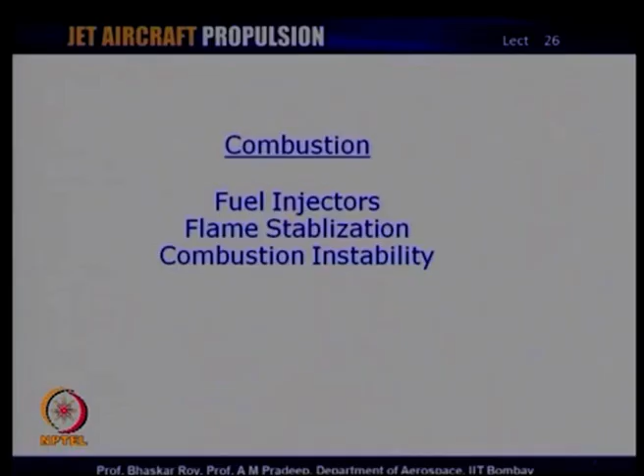So, these are the issues we will discuss in today's lecture, starting with the injection of fuel, then going on to the flame stabilization, and then talking about certain issues related to stability of the combustion phenomena itself in the combustion chamber. So, let us take a look at these issues now one by one.

Now, fuel injectors: people have been designing injectors for more than 50 years now. Various kinds of injectors have been designed over the years, and we will look at one of the most commonly used fuel injectors in most of the aircraft engines these days, and try to understand exactly how the fuel injection is carried out to aid the process of combustion. It is a little more involved than any other kind of fuel injector that one may have seen in any other kind of engine, and these fuel injectors are specifically designed for jet aircraft engines. So, they are unique kind of fuel injectors. Let us take a look at some of these injector related issues and one such very good modern injector.

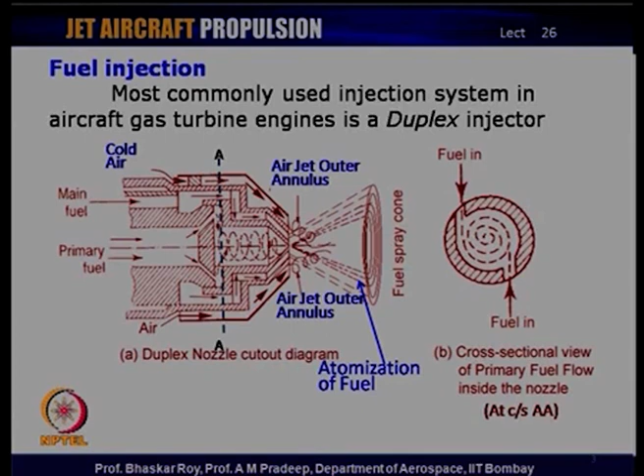So, having looked at the duplex injector, we can sum up by saying that we have two concentric fuel supply manifolds, which are supplying fuel into the combustion chamber. The central one is used only when low fuel supply is required, as I mentioned, which could be during cruise, and when high fuel flow rate is required during acceleration of the engine or of the aircraft, and during takeoff and climb, both fuel flows could be open and high fuel flow rate is supplied into the combustion chamber.

Both the fuel supply nozzles participate in the process of creating this concentric jet, that is the jet cone, and that spreads out into the combustion primary zone. And so, the primary zone is where this jet of fuel is infused, and that is where the flame is created. The spreading out of the jet cone or the fuel jet is the first step towards increasing the liquid fuel surface area, and that surface area increase is the intended purpose of creating this jet cone. And once that is increased, the jet actually breaks up into very small droplets, of the size of fractions of millimeters in diameter, and these droplets then evaporate very fast.

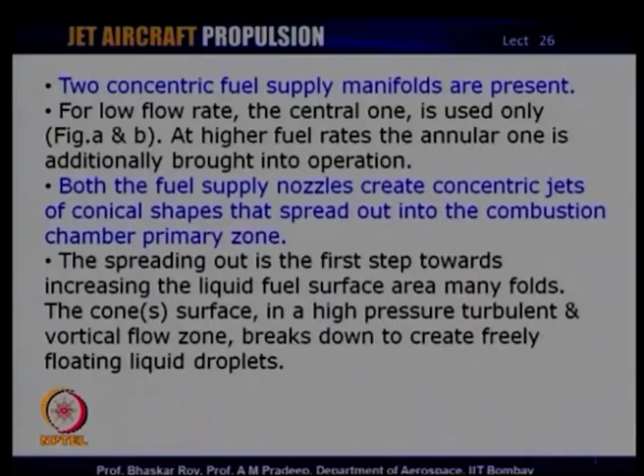So, the high pressure turbulent and vortical flow zone created in the primary zone breaks down this cone and creates freely floating liquid droplets, and that is the mechanism that needs to be created in the combustion chamber to aid the process of combustion. Without this mechanism, and there is a lot of engineering that goes into it, the combustion inside the aircraft engine would not be possible in the manner that it needs to be done. This later process increases the fuel liquid surface area many times over, and as a result it aids evaporation and mixing, and all this needs to be done in the primary zone with the air, and remember this mixing has to be done in a correct fuel to air ratio.

The additional annular air passage around the fuel, which is discharged through the nozzle's outermost annulus, as we have just seen, has as one of its main purposes to avoid carbon and other combustion product deposition on the face of the nozzle. Now, this is an important issue. Once the fuel comes out of the nozzle, you have flame, you have combustion products created, and remember the primary zone is a very low velocity flow area. So, once the combustion products are created, there is every possibility that some of them from the flame zone can float down and deposit on the face of the nozzle. Now, this is a problem. This is simply known as carbon deposition in simple engine terminology.

It means that a lot of combustion products are getting deposited on the face of the nozzle. Now, if that happens, the fuel exit may get choked, and the fuel would not come out of the opening that is created for the fuel jet. Now, this needs to be avoided, and this air jet has this additional job of making sure that the combustion products do not come back on the nozzle face, and they get literally blown away from the nozzle, so that the nozzle face remains clean for the entire operation of the engine.

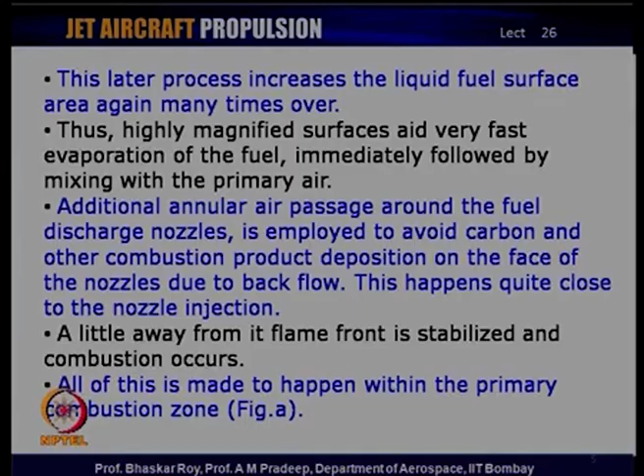We are talking about simplex injectors. So, we can have a quick look at what a simplex injector is actually. It is actually used in many gas turbine engines which have a comparatively simpler operation schedule and do not have too many high fuel supply and low fuel supply requirements, and steady fuel supply would be sufficient. This actually means that it provides a very simple fuel nozzle system.

Some of the later ones, as I mentioned, are also equipped with the outer annulus of air spray. That means, outside this fuel supply there is an air spray that is coming, which would aid the process of injection cone creation and also driving away the combustion products.

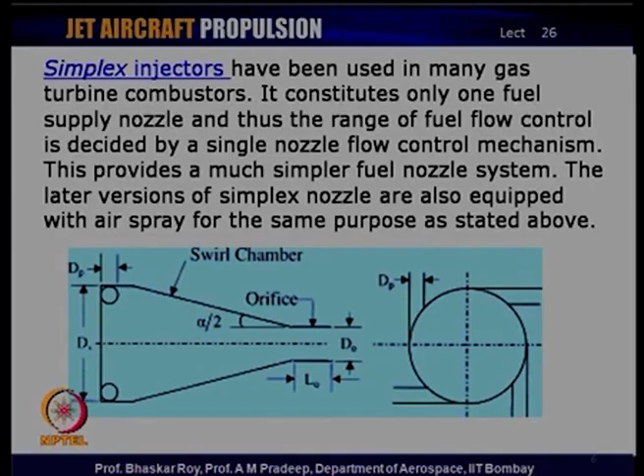So, this creation of this vortical flow inside the nozzle is extremely important, because it helps create the cone that comes out from the jet, and that cone is extremely important in the process of evaporation and mixing. Now, we look at some of the issues related to the combustion that are normally created by the combustion itself.

Now, during the process of an aircraft engine operation, we have seen an aircraft has to take off, it has to climb, it has to cruise, it has to do all kinds of maneuvers, and then it has to descend and come back and land. During all these processes, the fuel supply into the combustion chamber is most likely to vary. If you have a military aircraft which does all kinds of maneuvers, accelerations, decelerations, turnings and fast recoveries, during all these processes the fuel supply would need to be controlled very quickly.

So, the control of the fuel supply then also means that the injection process and immediately thereafter the flame that is created, that means the entire combustion process, would need to have a stability of its own. Now, this is easier said than done, because we have seen that the fuel air ratio should always be somewhere near about the stoichiometric ratio, the chemically correct fuel air ratio.

If the fuel is too much, it becomes a rich mixture and the combustion gets blown out. If the fuel is too less, it becomes a lean mixture, and then again the combustion gets extinguished. So, in a very narrow range the fuel air mixture needs to be held. So, the trick is to hold the fuel air mixture very close to the correct ratio.

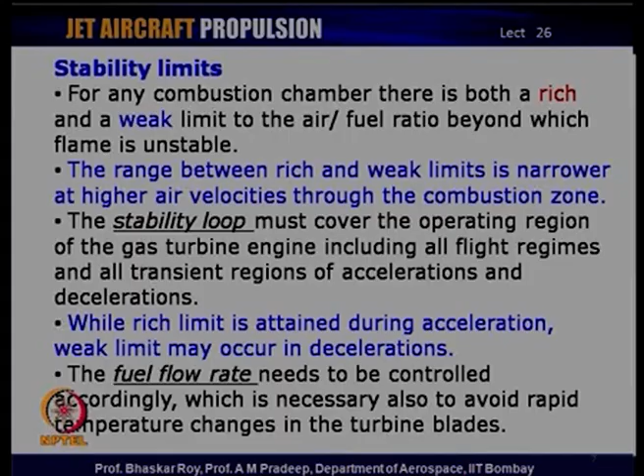You see, if we go into the stability loop to the higher side of the rich mixture, if you allow the rich mixture to operate for long periods, you are delivering very high temperature to the turbine. Now, if you deliver high temperature to the turbine, it is most likely the turbine life will get substantially reduced. So, it is not a good idea to operate the engine with a rich mixture for a prolonged period of time.

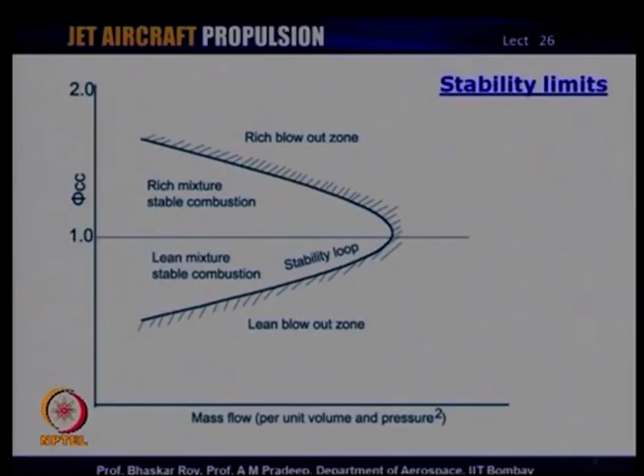So, modern engine designers would try to make sure for most of the operation the engine actually operates with a somewhat lean mixture for stable combustion, so that the turbine life is also substantially enhanced, in addition to the fact that you are consuming less fuel. So, the specific fuel consumption of the whole engine would be more economic for operational purposes.

So, if we look at some of these issues, we can look at how the flame is to be stabilized. You see, many combustion chambers have various kinds of flame stabilizers.

They are called flame stabilizers. Now, they are also called flame holders, which means that you put some kind of an element over here, which is a solid body in the main primary zone of the combustion chamber, and as the fuel air mixture flows over this, behind this flame holder there is a zone which is a dead zone as far as the aerodynamics of the air motion is concerned, and behind this dead zone it creates a low

So, the flame holder essentially does two things. It decelerates the fuel air mixture substantially and allows the flame to be stabilized, and as a result of which this speed of motion of the air fuel mixture is matched with the motion of the flame. Now, as we have seen before, the flame moves from one point to another, and the motion of the flame itself is often referred to as the flame speed.

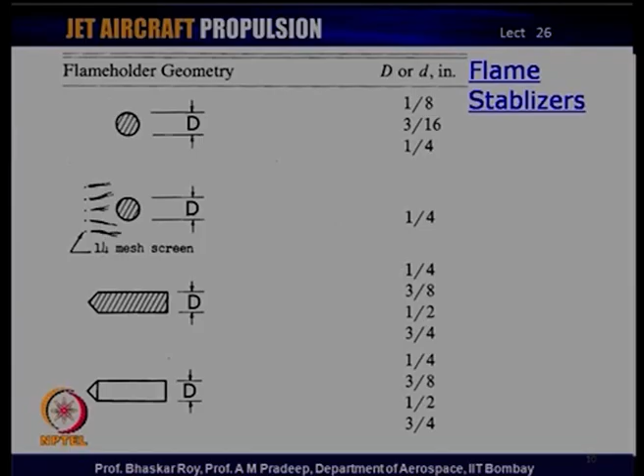We can have some issues related to combustion instability if you do not ensure, or for some reason even after you have taken care to create a stabilizer, to create a nice stabilization zone, even after that there are always possibilities of certain kinds of flame instability or combustion instability somehow erupting inside the combustion chamber.

Now, this is a problem that is known for a long period. A lot of research has gone into it, a lot of studies have gone into it, and the combustion instability continues to be a little bit of a worry to many of the combustion designers. Now, let us have a look at what are the causes of combustion instability.

You see, the main thing that is happening there is the chemical reaction. Now, chemical reaction essentially gives you the energy input into the engine. Now, without going into the chemical kinetics, we can say that there are three physical factors responsible for combustion or whatever is happening inside the combustion chamber. One is the local and instantaneous air fuel mixture ratio.

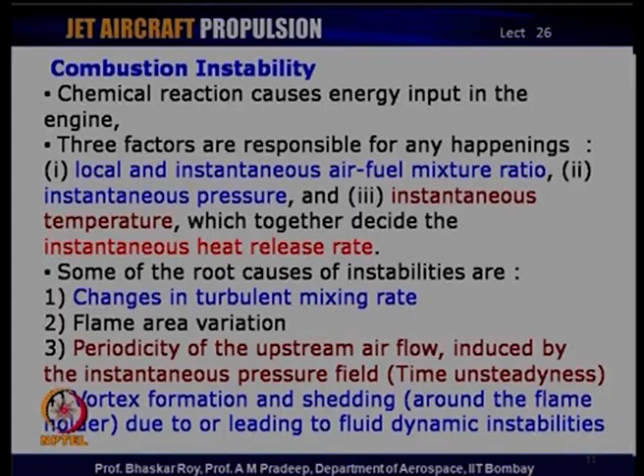And then at such a high pressure, you are releasing very high temperature, and with a combination of high pressure and temperature, if those two parameters are fluctuating, it could create a lot of instability to the entire engine, and that is most unwanted as far as the engine operation is concerned.

So, holding the airflow steady, holding the pressure steady, holding the temperature steady during the process of combustion is extremely important, because any fluctuation in any of these three primary parameters could lead to certain kinds of fluctuations, instability, and that could be catastrophic, because it could lead to a complete blow up, almost like an explosion. So, it is a kind of instability which is most avoidable.

Now, one of the reasons modern aircraft engine designers are looking into this instability more closely today than probably ever before is that most engines are now asked to operate in the low fuel-air mixture zone, that is a lean mixture zone. Now, if you are operating in a lean mixture zone, you are operating in what we have called a low equivalence ratio zone.

Your flow is now having a lean mixture, and with a lean mixture there is a possibility of instability, more instability than in the rich mixture, and this instability could be catastrophic. So, in the process of trying to achieve a low specific fuel consumption of the engine, it could trigger instability inside the combustion chamber, which could be catastrophic.

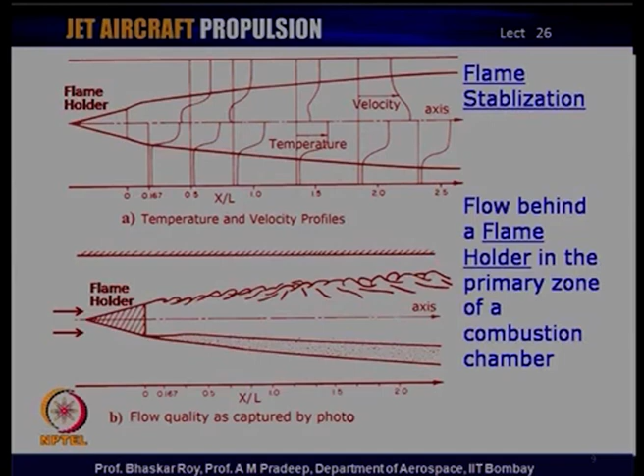However, if we lose control over this mixing process, and if it becomes violent, not only will it not lead to flame stabilization, it will actually lead to flame destabilization, and it will lead to combustion instability. So, that is one of the issues that we need to be very careful about.

And then the cause and the effect together can get coupled. That means, whatever is happening gives rise to instability. Instability by itself then acts backwards to produce more instability of the airflow or the turbulence, which again builds up more combustion instability. So, they can get coupled, giving rise to an oscillating combustion process, which is most unwanted.

The other cause is the disturbance signal which comes from outside the combustion chamber, which could be the compressor, or some fluctuation in the fuel supply process, which could result in similar instabilities. Now, whether such oscillations would be stable, decaying or amplifying depends on the nature of the excitation, the coupling mechanism which we just talked about, and the inherent damping capability of the combustion chamber and the combustion geometry that we have.

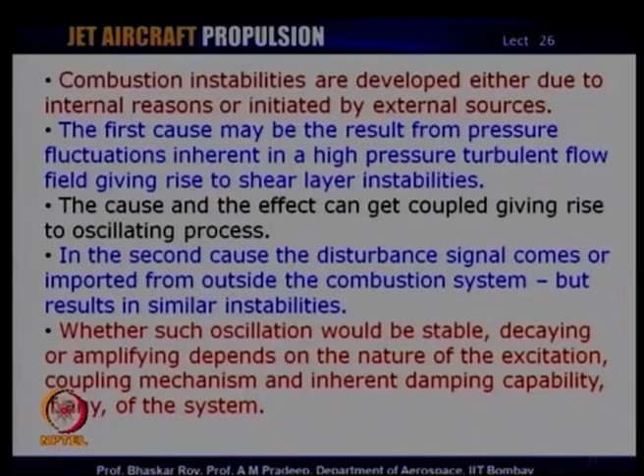So, the combustion chamber needs to be endowed with a certain amount of damping capability. Physically, some of the instabilities that occur may need to be immediately damped, so that they do not grow, and this is what the combustion chamber designer has to be careful about. So, we will look at some of the combustion instabilities that can occur.

If you see here, the combustion that is initiated from here, and after a very small amount of time, you can see it develops into an instability, and the frequency of the instability can get decreased or increased depending on the phase difference between the heat release and the pressure fluctuation.

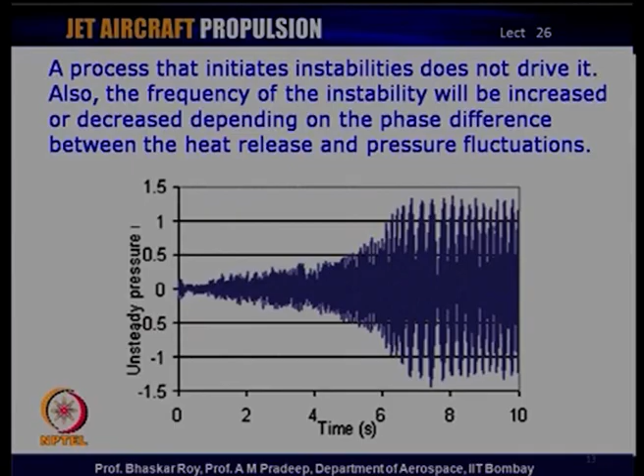And then this phase difference between the heat release and the pressure fluctuation is an important issue, because heat is released by the combustion phenomenon. On the other hand, the pressure fluctuation is getting imported from maybe outside, or it may be getting created by the combustion itself. So, the coupling of these two and a phase difference between these two can actually lead to certain combustion instability, and it can aid the process of instability, and as a result of which it can go out of control.

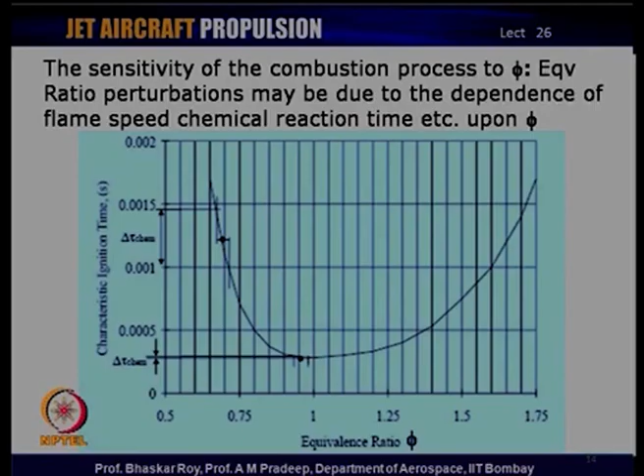On the other hand, the lean mixture is desired for low fuel consumption or low specific fuel consumption for the whole engine. So, if you want to design a combustion chamber for an engine with low fuel consumption, then lean mixture needs to be studied in more detail, because that is where you start getting more instability of the combustion phenomenon. So, we have looked at various possibilities of the combustion, where you have various parameters, various physical phenomena that impact the process of combustion.

And as we see now, the desired combustion chamber of the future, in which it will operate very well at low fuel air mixture, at low equivalence ratio, also has a greater possibility of combustion instability, and this needs to be studied and factored into the combustion chamber design. Otherwise, the combustion would experience more of instability with catastrophic possibilities. So, these are the things that put together need to be factored into a combustion chamber design.

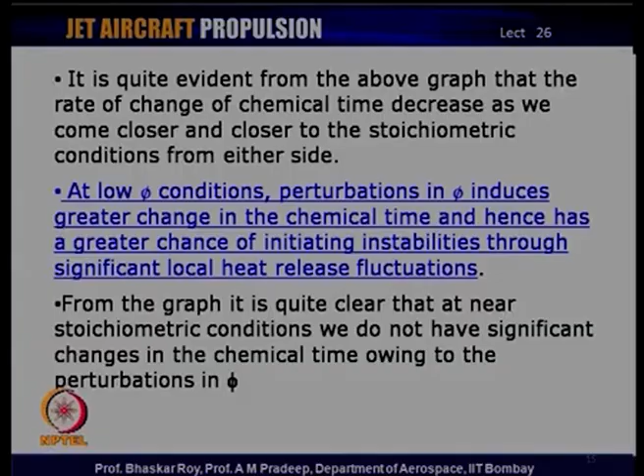So, we have studied all kinds of combustion chambers. We have seen the combustion problems. We have studied the various combustion parameters and the combustion mechanism. And now, we see that it has a number of issues, number of problems that need to be looked into very closely, especially for the futuristic engines, where it will operate smoothly without problem with comparatively lower fuel air mixtures, that is lean mixtures, so that the engine has lower fuel consumption rate. And to do that, you need to have stable combustion, and we see that the stable combustion needs to be very well studied and attended to, so that you have a good combustion chamber which produces stable combustion at low fuel consumption rate.

With the study of this combustion chamber, we now come to the end of the combustion chapter. We will move on to the other chapter of the aircraft engine. So, the next chapter that will be taken up will be on intakes and nozzles, which are the two non-working elements of an aircraft engine. Intake is in the beginning of the engine and nozzle is at the end of the engine, and these two components would be now taken up, and they would be discussed in detail by Professor Pradeep.